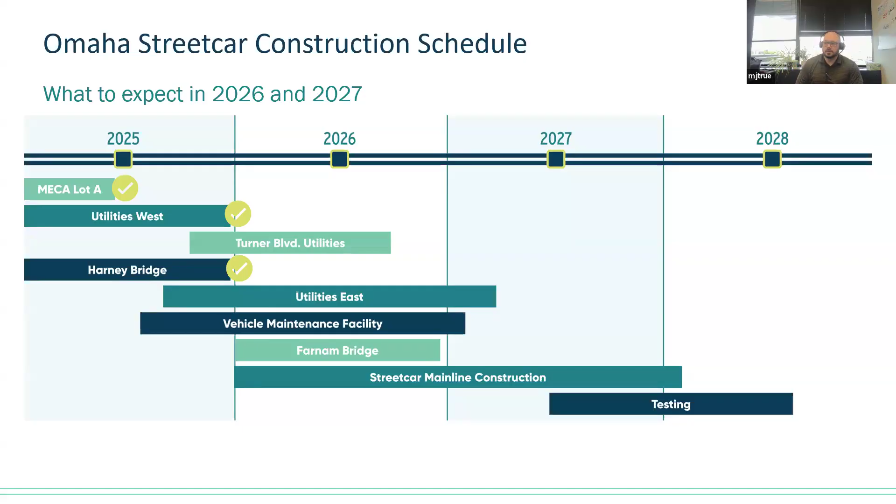As you can see, we're in the heaviest construction timeline right now. We're about halfway, a little ahead of it. That does mean we're wrapping up on the west end of our project, where Farnam and Turner are - we've got a lane going through right now. We are going to start to see some of this relax as we progress more and more through the year, but we are in the heat of it through basically this summer and into the fall, so we're just going to be open and blunt with you about that.

And now we'll get into the actual construction projects and turn it over to Steve Rue. Awesome, thanks Mike. So yeah, we are still in active construction on 3 of our utility projects - the bridge project, and 2 utility projects that are preceding the main line. So we'll go through those.

First one, the I-480 bridge project. So we set the girders at the beginning of last month, which is a huge step in getting this bridge to completion. Our next really big milestone we're looking forward to is the deck pour, which we're anticipating at the beginning of June, which really does a lot to keep this project moving along and reopen this critical access point into Midtown. So the schedule has been really aggressive on this project, and we are maintaining to it. It's really great to see.

So like I said, the girders have been set. We have opened 28th - 28th has been closed for a while, going to the north up to Dodge. That is open again. So if you're getting off on 480 there at the Harney exit, you can make it north all the way to Dodge now. Through there, it is one lane. You can also come down Farnam and turn right there to get to the north, unless you are a large truck - there are many signs there, but take them very seriously.

It is an extremely tight turn, and there is no opportunity to hop the curb or swing it wide. There are Jersey barriers on one side, and a large drop off on the other side. So you will not make it - you do need to turn prior to 28th Street. Don't wait till you get down there. I would suggest you just take 24th to the north if that's what you need to do, if you're coming down Farnam. But just believe those signs.

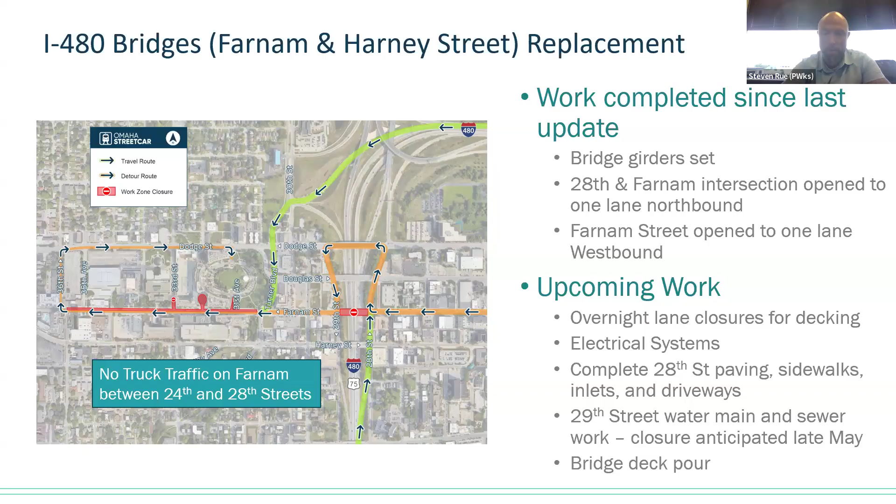So all in all, this project's going really well. Making great time on it. So really good to see. On our next project, the Utilities East.

So this is the largest utility package that we had out of all the packages that we have going. I know I said this last month, but if you look where we started, way down in the Capitol Loop District, we really are pushing out west. This project is scheduled to really complete the vast majority of construction by the end of this year, and we are approaching that halfway point as we approach the halfway of the year.

So that work tracks. As we're coming through here, you're going to continue to see a lot of traffic shifting. I know Mike mentioned that at the beginning. A lot of traffic shifting, a lot of lane closures, a lot of signage. That's just due to the nature of the work as we are doing sanitary work as we come through the block that may be on the north or south side, and then we're doing water main work on the opposite side of that block, and then we're trying to go back and pick up all those water services.

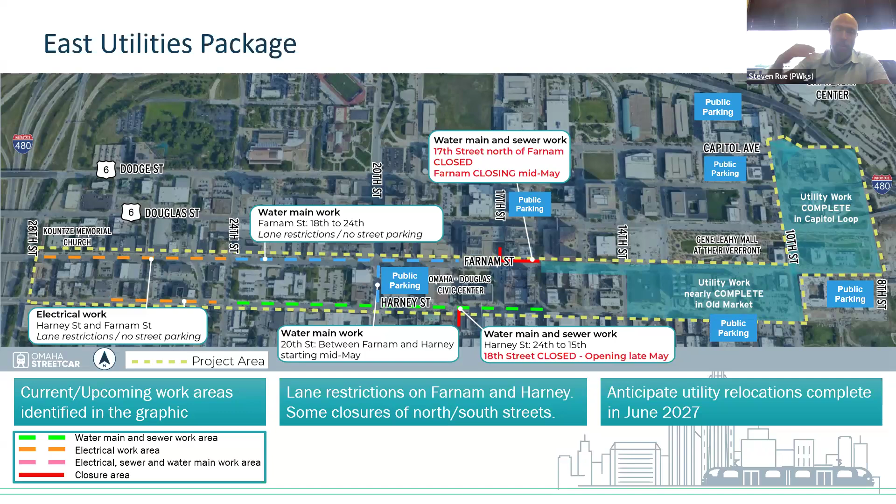So I have seen a lot of questions where people are like, I don't understand why it changes so much. It's just the nature of the work as we try to complete the mains, the largest transmission parts of the service that's there, and then we go back and connect all of the people that take that service. So just pay attention to signs.

We do have some closures right now. 18th Street is closed at Harney, that'll be through late May. We do have an upcoming closure at Farnam Street, that'll be closing mid-May. 17th and Farnam entirely will be closed in mid-May into June. So you'll see lots of signage about that as we get closer to an exact date on that. And then there are many restrictions just through this corridor, so just be alert as you go.

I do think it's important to see, just a couple months ago, this electrical work, we were up to 24th Street. Now the electrical work's all the way out to the bridge, which is kind of the match point for all these projects—they all come together in the middle. So you can really see month to month, if you go back, and we're so inclined to watch all these webinars back to back, you can see that we are progressing west, month after month after month.

So pushing towards our completion dates and alleviating a lot of the traffic restrictions.

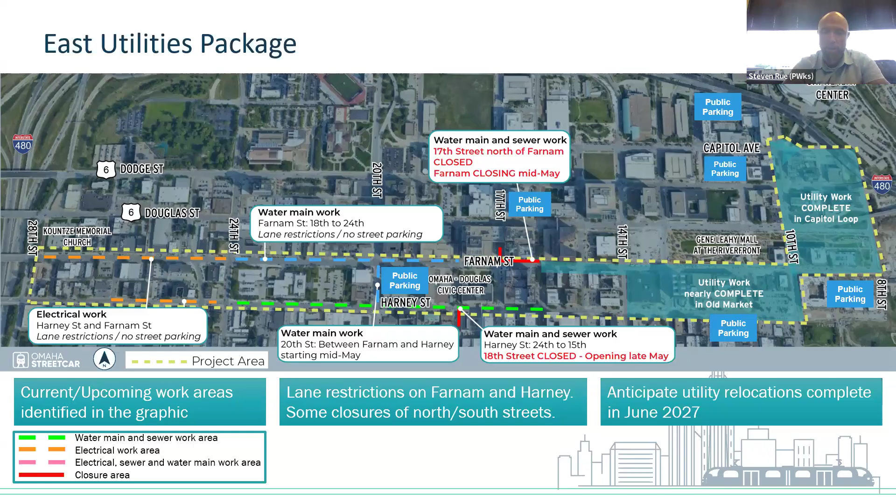Turner Boulevard package. So this was the very, very, very deep sewer manhole that was right there in the middle of Turner and Farnam. That's why that intersection was closed. So we've completed that very substantial, highly technical portion of the work. So that's great. We've got that sewer manhole built back up. We have our new access point there.

I think we referenced this at one time, it was like 3 giraffes tall or 4 giraffes deep or something like that. But it was 35 feet deep. It was a very deep structure to build. So it's great, we got that done. We had the intersection back open on the timeline that was projected at the beginning of the project, which is great.

And so now we have reestablished westbound traffic on Farnam. For a while there, when everything was fully closed at Farnam and Turner, we were allowing eastbound traffic basically from 33rd back in to access those businesses. Now that Farnam is open the entirety from the bridge, everything is westbound. So if you've been used to going down there, you need to access it all. It's all one lane, all westbound through there. So just keep that in mind if you haven't been down there in about a week or so.

There's no more, don't take that right on 33rd and go head on into traffic. You're gonna have to loop around and go through.

If you are trying to access these businesses down here, I would like to reiterate, I know there's a lot of traffic and parking restrictions, but there are the 2 parking garages right there on 33rd and Farnam, on the north and south side, that have 2-hour free or discounted parking to access these businesses. So feel free, you can still get down there. You can park. A lot of those businesses are basically attached to the parking garage, so pretty easy access right there. Just alleviate yourself from trying to find a spot on the street.

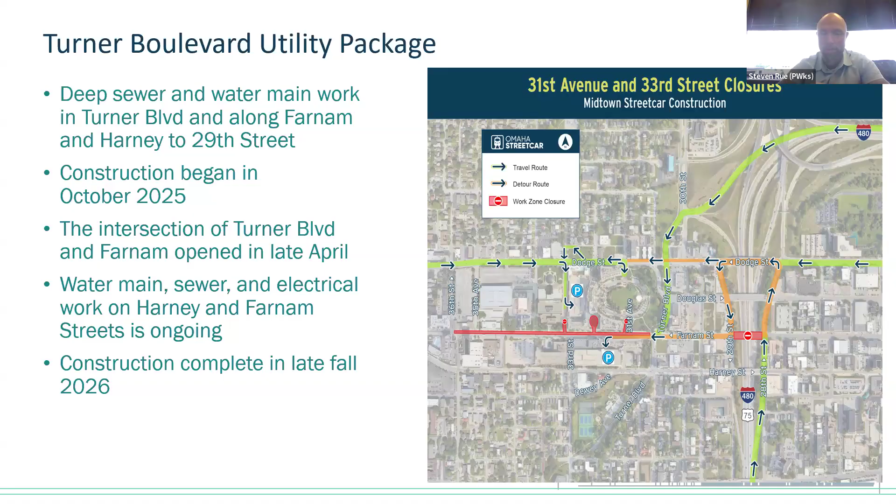This project will continue to pick up some sanitary and water main work, both along Harney and Farnham, and this progresses into the fall. This project's honestly going really well, and the completion of that really big sewer structure was huge, so great to see that get done on time.

And then I will give it back to Mike, and he's going to talk about mainline track. Thanks, Steve.

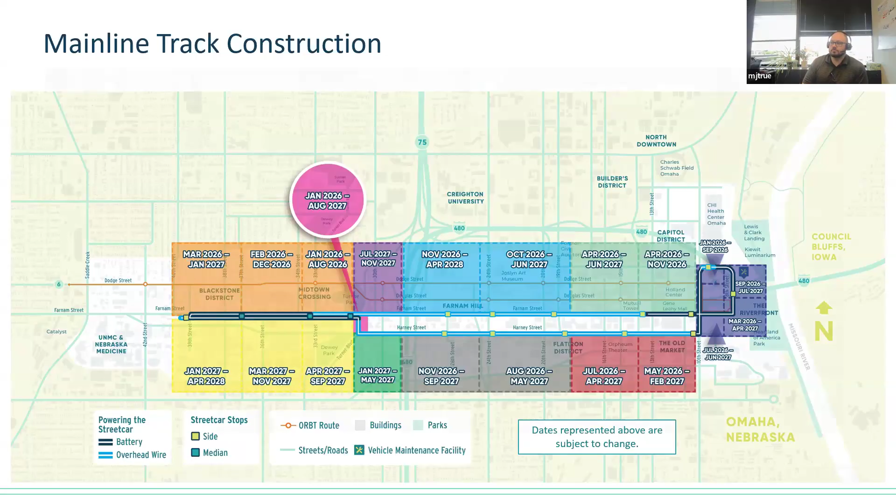So starting out west, kind of turning into Turner Boulevard, we do now have westbound only going through. There is a parking garage you can park in just east of 33rd. 33rd used to be open and we were directing you down Dodge to that parking garage. You can still pull in, park there, and then go back out and take a light to go east or west on Dodge. But we do have some pedestrian crossings where you see the little walk symbol, those are bridges put across. It'll be there as they go through. And obviously if you need to, eventually you can either go all the way out and take Dodge, or come back along Harney Street. This work is going to keep going through about this first 7-1 phase, which will be through about August of this year.

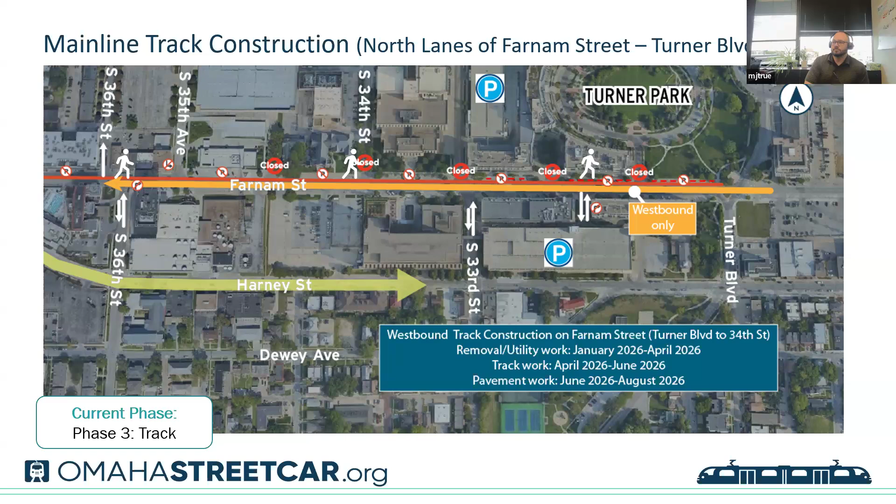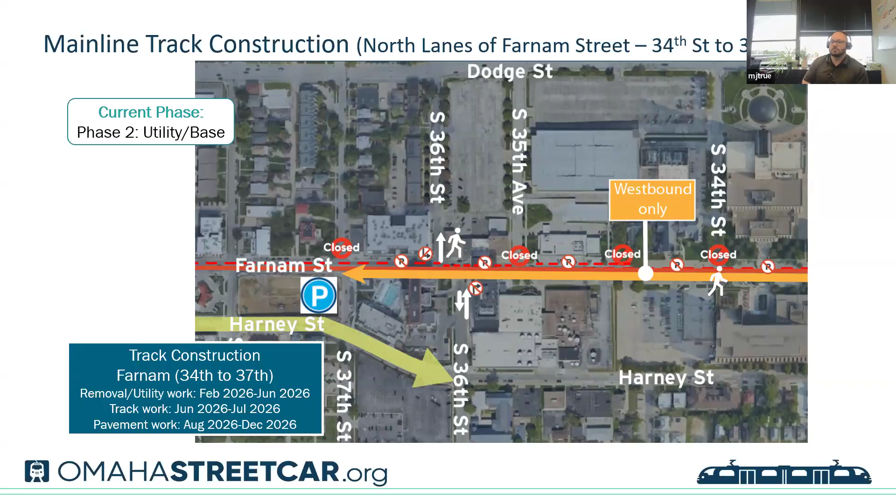And towards where our western terminus is going to be, we are in the demolition phase out there right now, that's the first one. So if you go down to the east phase, they're going to be casting in the rail fairly soon and working their way down. That gives you a rough timeline of what you're going to start seeing. If you're on this end, if they're doing demolition and it's 5-6 months later before they start casting in rail, you can actually see the progress of each phase, demolition, civil, and all the way down to the paving. Anyway, as it says up there, if 38th Street is closed, 40th and 36th are open, and if 40th or 36th are closed, we got to leave 38th. So we'll have those alternating streets. That's going to be really the only changes out here.

Again, the primary parking structure is the bigger P, more at the center of the screen. That's got several hundred spots. There is a small lot near 40th that is also available for public parking. But the one with the most spots is going to be down there between 38th and 37th on the south side of Farnam.

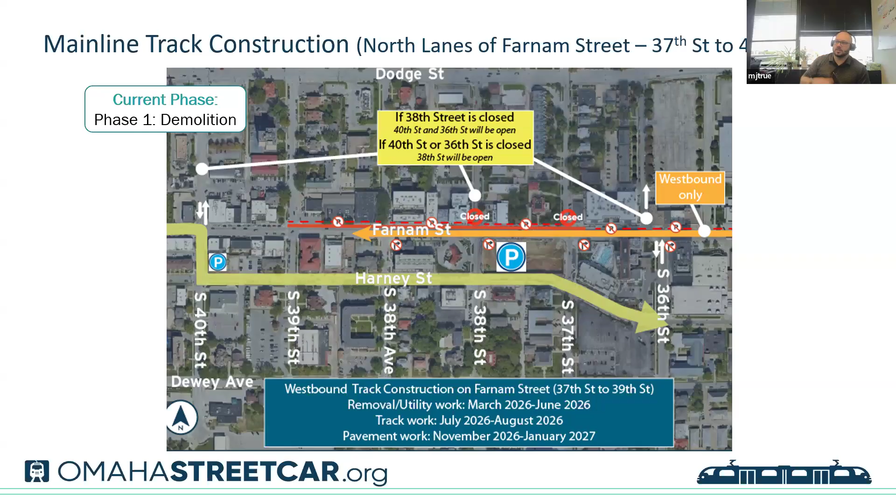Capitol Loop, as we'd mentioned, along 10th Street, just north of Dodge up to Capitol, we got the first few sticks of rail. That's where they were cast. We're going to be getting additional rail into there, and we will have a right turn available going across over to 8th Street and down, and we may be reordering and resequencing some things so it can actually turn out sooner.

For right now, in this Capitol Loop area, if you need to get in, go down Douglas and you can turn up. And if you need to leave, you can either go back out on Douglas. We've worked with the state, because that's technically a state highway, to either turn onto 10th, or if you're down there for events, we've noted that traffic is a lot smoother if you go out Riverfront Drive up to Abbott. Especially if you're in and around the CHI Center, you're just going to meet all the other traffic, and this helps alleviate that. It's also closed south of Douglas there, and we've already cast some rail in there as well.

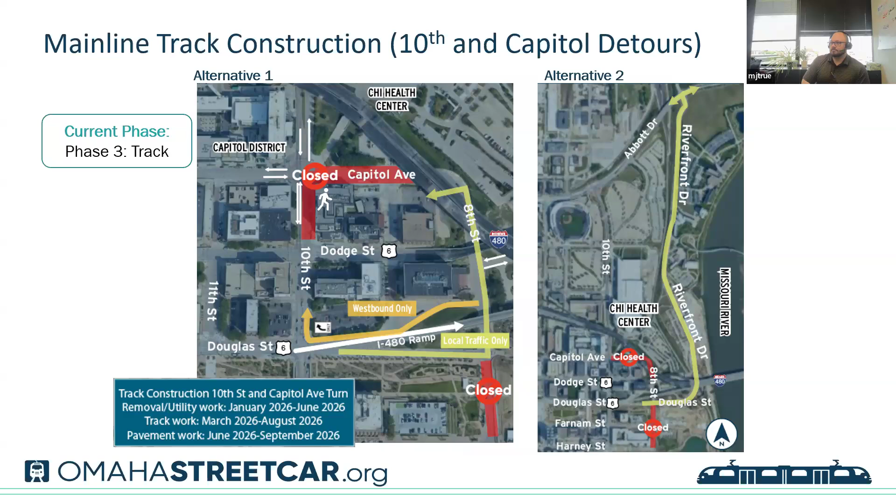Moving on to that particular spot, of note, wherever you see the little walking symbol that you'd normally see crossing the street, that's where we have pedestrian bridges put in. There will be, and there was this week, and I believe there's some tomorrow as well, a few hours with flaggers as you go down Farnam. So do be careful and cautious entering these construction zones. There will be equipment moving around, and you may have brief intermittent interruptions in normal traffic flow, but you can get down Farnam, get to 8th, and get into the parking garage. Then to leave, you'll have to go out Harney.

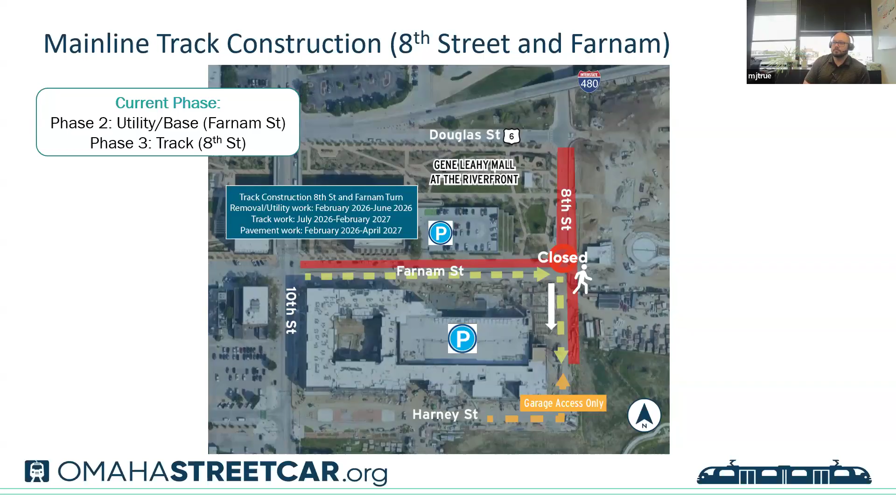This is the rail stockpile shown there, if you want to go see the 320 feet welded up. For right now we've got crossings at either end. As work wraps up in and around 11th Street, the intent is to get another mid-block crossing over to the park at some point, but this is now in phase 1 demolition, and this will be going through towards the end of this year, maybe a little early in November.

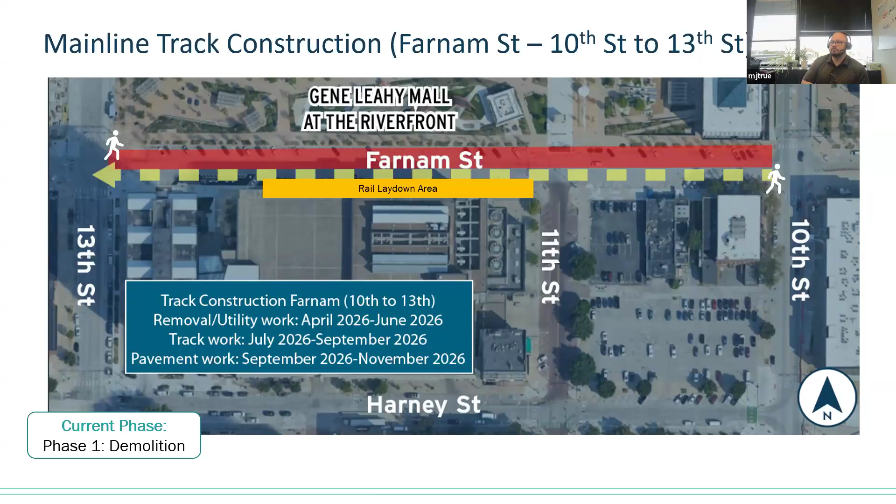We're going to be starting now on the Harney Street area, from 10th to 13th, as their first phase in zone 11. This will make 12th Street and 11th terminate at those locations because they'll be going across it, so 10th and 14th are going to be your end caps for now. There's no rail pile on this side, and they're just getting into what's calling it pre-demolition, pre-construction. They're going to have machines out there and surveyors confirming utility locations and making sure all the plans line up accordingly. This will be going through until early next year.

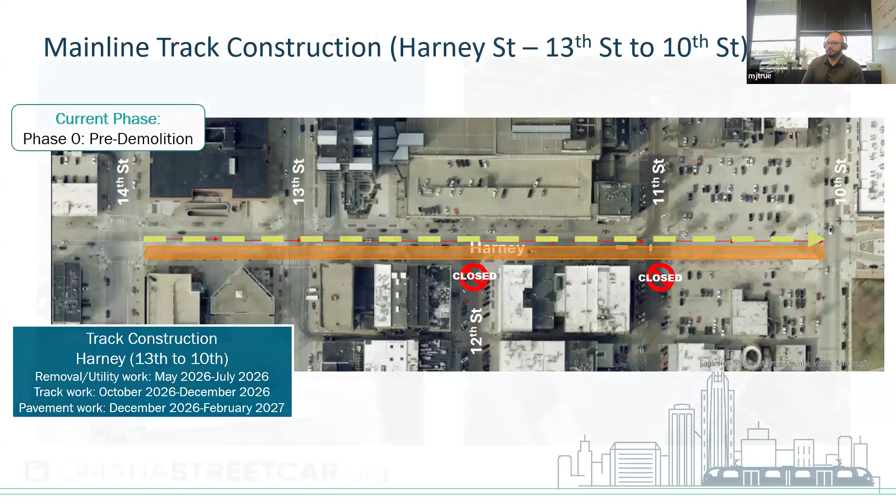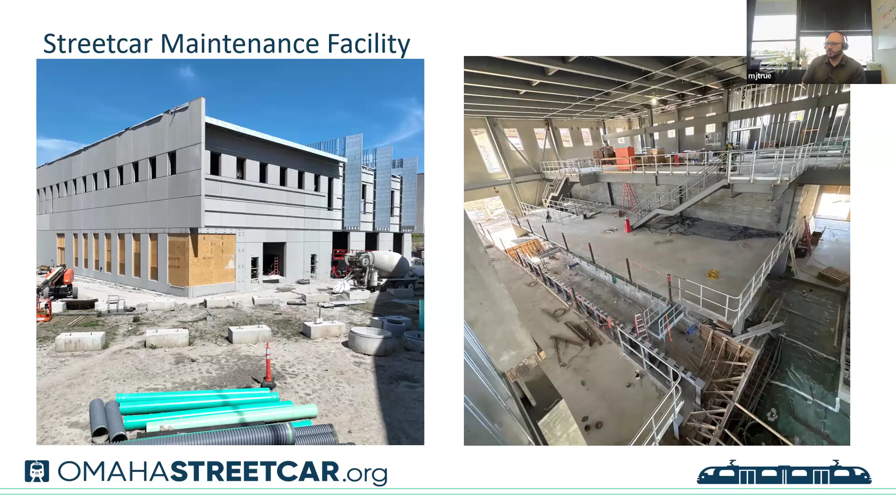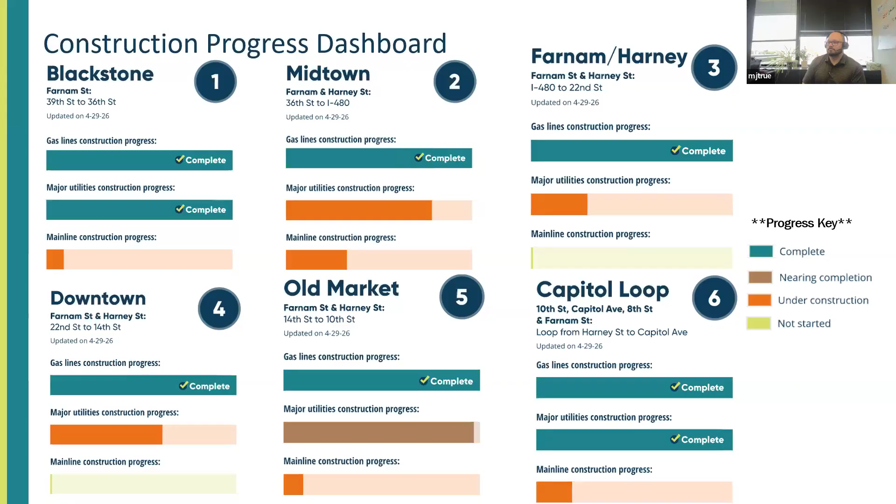We understand this is a lot of information and a really big project, so we have a couple different ways for the public to stay involved with us. On the first Wednesday of the month at noon, we have a webinar. You can pre-register so we can get that link over to you. Our next one will be June 3rd. These also go online afterwards, so if you're not able to join us live, you can watch them afterwards. We also have our monthly board meetings.

Next, we have a website and text messages that Mike was referring to. On our website, under construction updates in the top nav, we have a landing page for each different neighborhood along the corridor so you can get specific information for your area. We also have text messages. If you'd like to sign up, you can choose which neighborhoods you're most interested in so we can send those alerts directly to your phone.

Other ways to get in touch - myself and Wendy are the primary communicators for this project. So if you ever have any questions, just feel free to send us an email or give us a call, and we'll be able to answer any questions you have about the project.